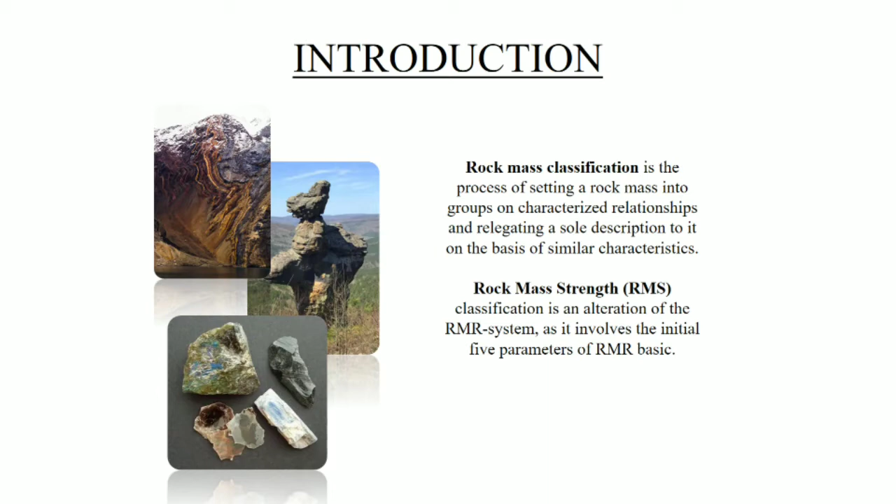Rock mass classification. Rock mass classification is the process of setting a rock mass into groups on characterized relationships and relegating a sole description to it on the basis of similar characteristics. While for rock mass strength, RMS classification is an alteration of the RMR system as it involves the initial 5 parameters of RMR basic. In the background of our project, there are 4 principles in rock mass strength, which are mathematical modeling, rock mass classification, large-scale testing, and back analysis of failures.

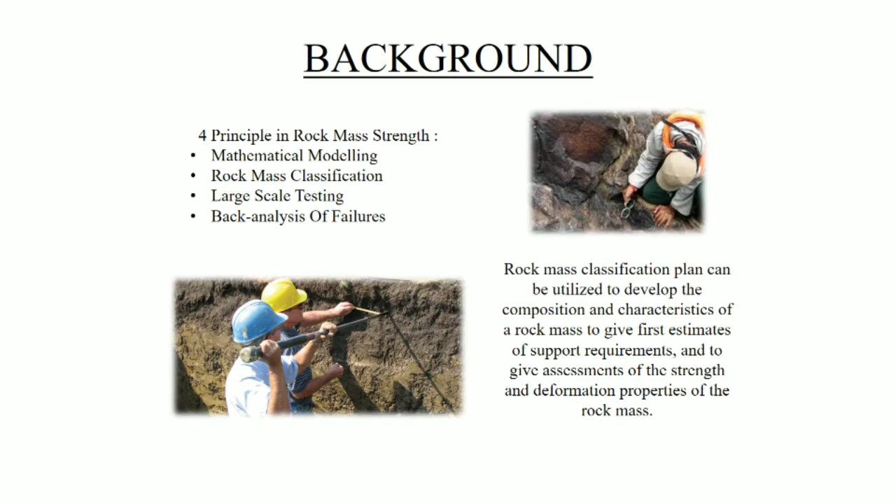In rock mass classification, plan can be utilized to develop the composition and characteristics of a rock mass, to give first estimates of support requirements, and to give assessments of the strength and deformation properties of the rock mass. The significant parameters in rock mass strength RMS. There are 6 of it, which is condition of discontinuity, joint or discontinuity spacing, groundwater condition, uniaxial compressive strength UCS, physical scale, and rock quality designation RQD.

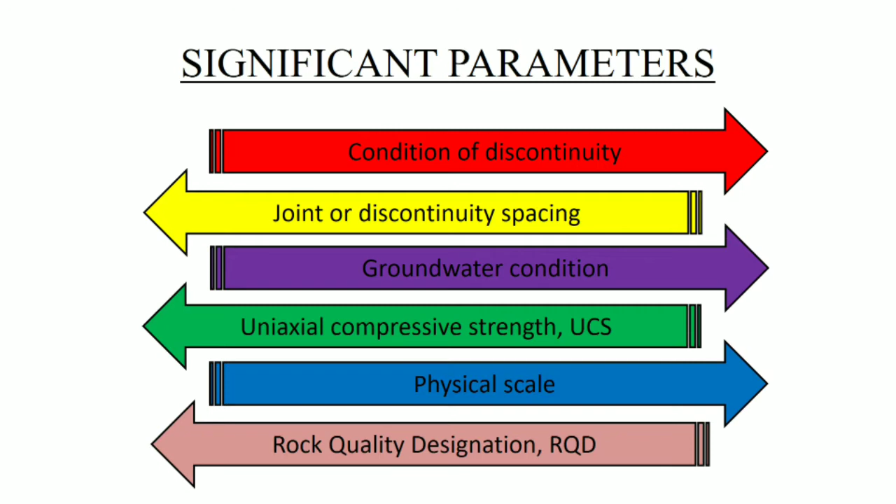In literature review, according to Bieniawski 1993, rock mass classification is the process of setting a rock mass into groups or classes on characterized relationships and relegating a sole description to it on the basis of similar properties, such that the behavior of the rock mass can be anticipated. He also stated that the rock mass classification systems were planned to act as a design aid and were not expected to substitute field perceptions, analytical considerations, measurements, and engineering judgment. However, it should be utilized related to other design schemes to devise a general overall rationale compatible with the design objectives and site geology.

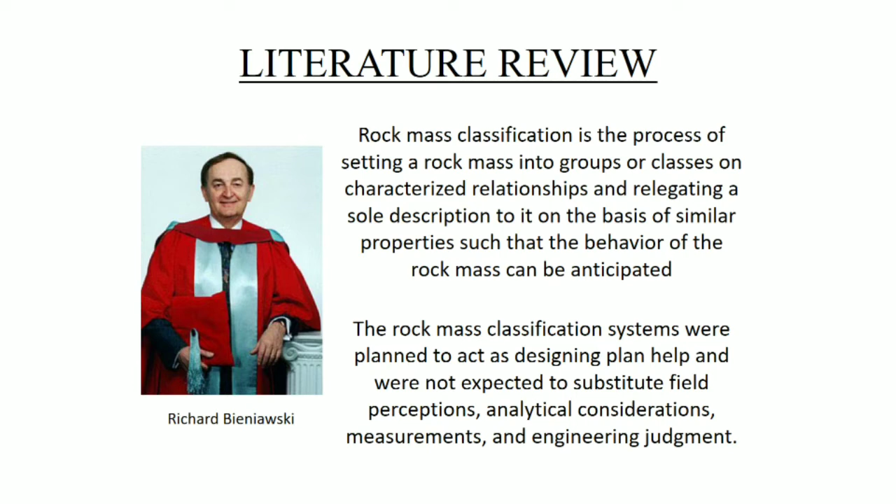The objective of rock mass characterization and classification. There are 5 of it. The first one is to partition a specific rock mass formation into various rock mass classes of fluctuating quality to provide a basis for understanding the characteristic of each rock mass class. To identify the most significant parameters influencing the behavior of a rock mass. To derive quantitative data for engineering design.

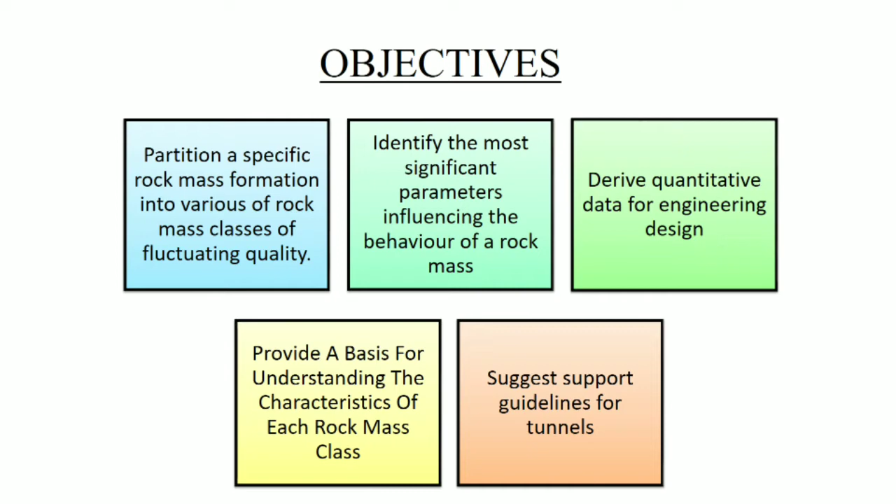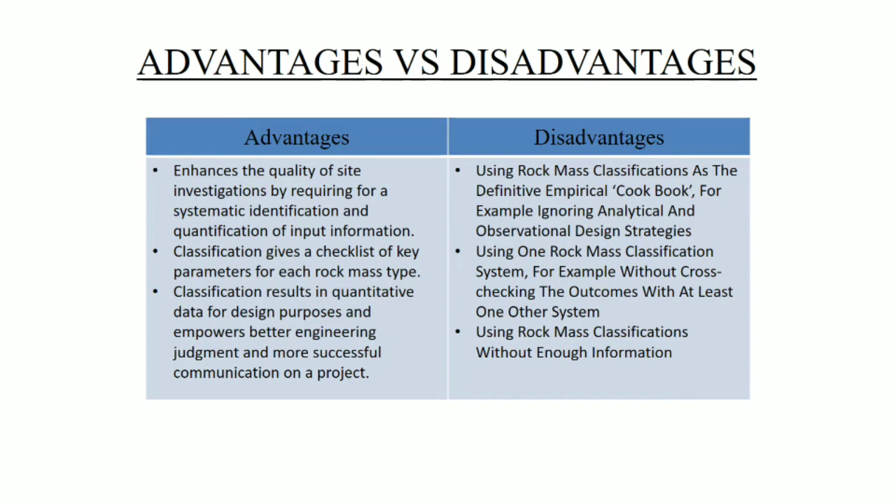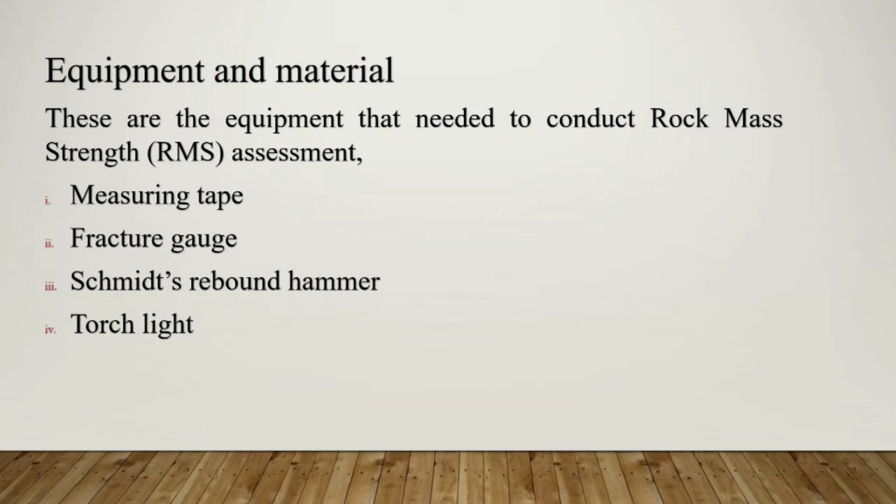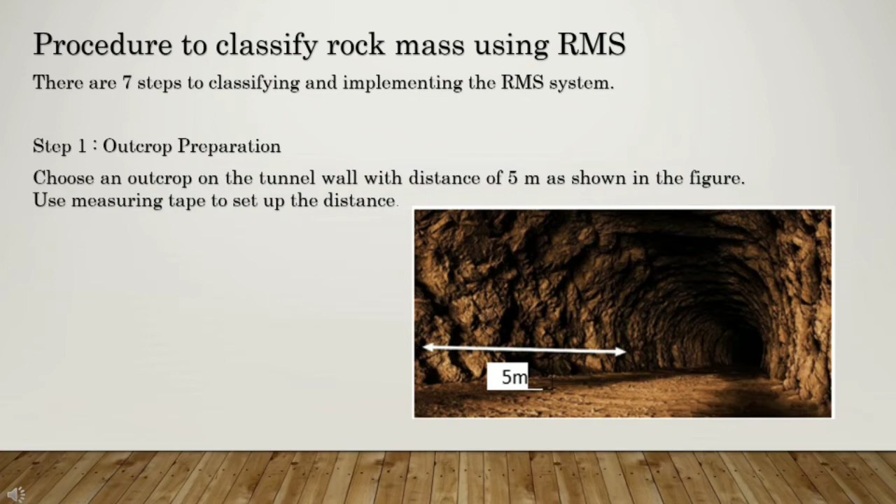Next is the advantages and the disadvantages of rock mass classification. As we can see from the slide, there are few of the advantages and the disadvantages provided. These are the equipment needed to conduct rock mass strength assessment: measuring tape, fracture gauge, Schmidt rebound hammer, and torchlight. There are 7 steps to classifying and implementing the RMS system. Step 1. Outcrop preparation. Choose an outcrop on the tunnel wall with distance of 5 meters as shown in the figure, using measuring tape to set up the distance.

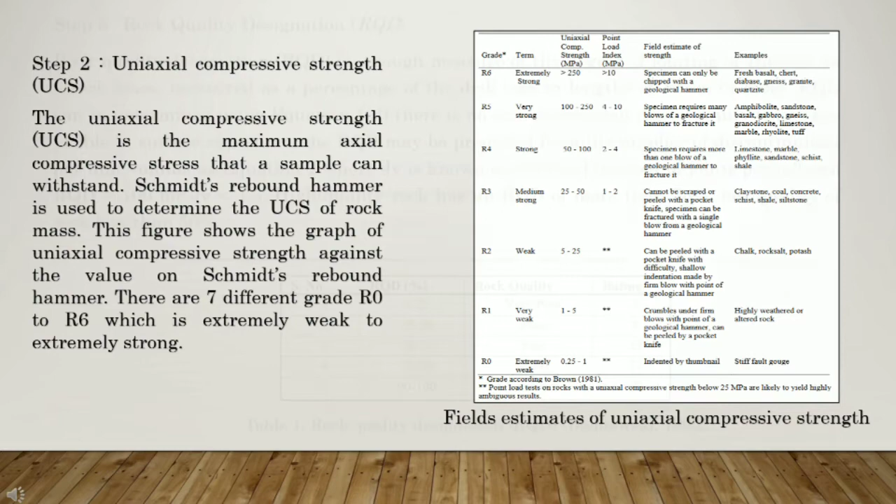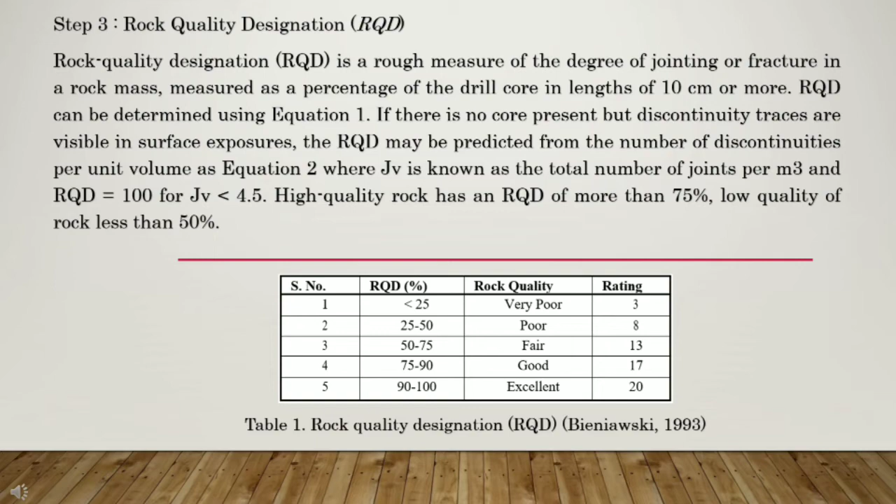Step 3. Rock quality designation. Rock quality designation is a rough measure of the degree of jointing or fracture in a rock mass, measured as a percentage of the drill core in lengths of 10 cm or more. RQD can be determined by using equation 1. If there is no core present but discontinuity traces are visible in surface exposure, the RQD may be predicted from the number of discontinuities per unit volume as equation 2, where Jv is known as the total number of joints per meter cube, and RQD equals 100 for Jv less than 4.5. High quality rock has an RQD of more than 75%, low quality rock has less than 50%.

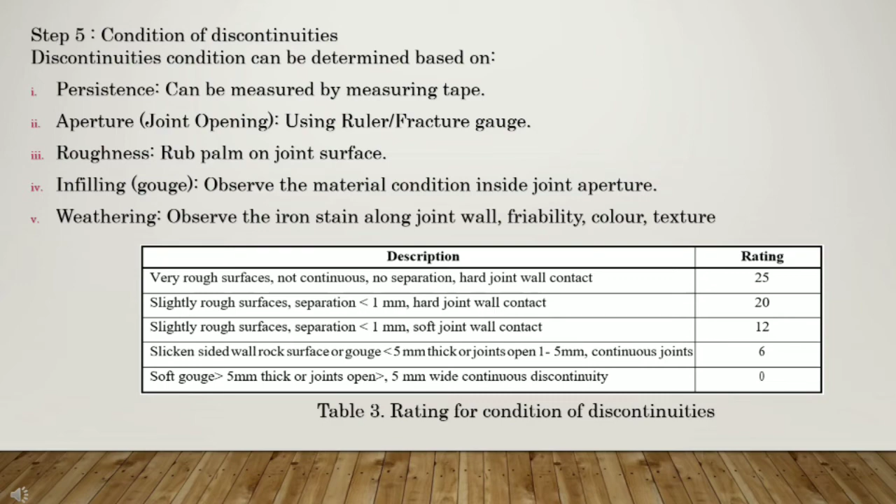Step 4. Joint or discontinuity spacing. One of the major geological features in a rock mass to classify strength is through joint or discontinuity spacing. Discontinuity spacing is one of the important parameters in describing the strength of a complete rock mass. Step 5. Condition of discontinuities. Discontinuities condition can be determined based on persistence, which can be measured by measuring tape; aperture, joint opening, by using ruler or fracture gauge; roughness, rub palm on joint surface; infilling, observe the material condition inside joint aperture; weathering, observe the iron stain along joint wall, friability, color, and texture.

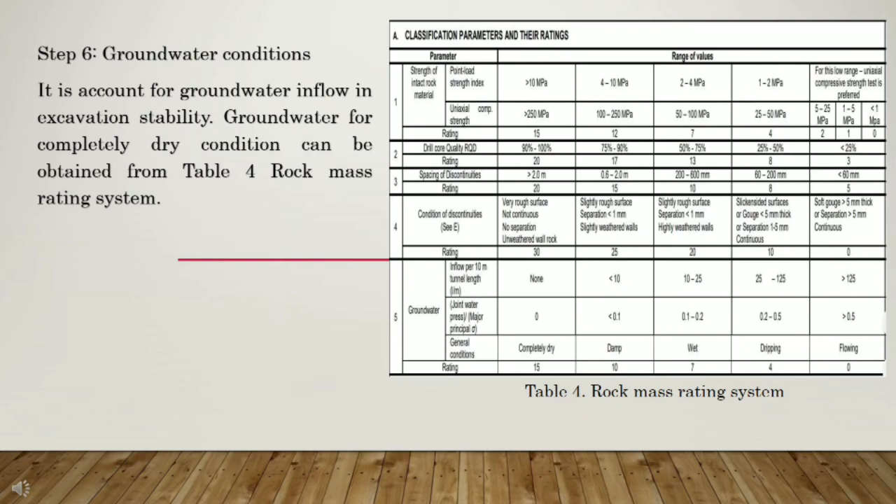Step 6. Groundwater condition. It accounts for groundwater inflow in excavation stability. Groundwater for completely dry condition can be obtained from the table below, rock mass rating system. Step 7. Physical scale. If the sample size increases, the scale effect in joints is that the peak shear strength decreases. The mechanical behavior of the rock mass depends on the strength of blocks created by random patterns of discontinuities and their strength. The number of blocks increases, the tilt angle also increases.

Rock mass properties are governed by the properties of intact rock and the properties of discontinuities in the rock. Intact rock can be referred to the fractured blocks between the discontinuities in a typical rock mass. Discontinuities in rock means any separation in rock mass having zero or low tensile strength. Therefore, the properties of rock mass can be determined by the parameters of rock joints and rock material. The existence of rock joints, material parameters and boundary conditions play an important role.

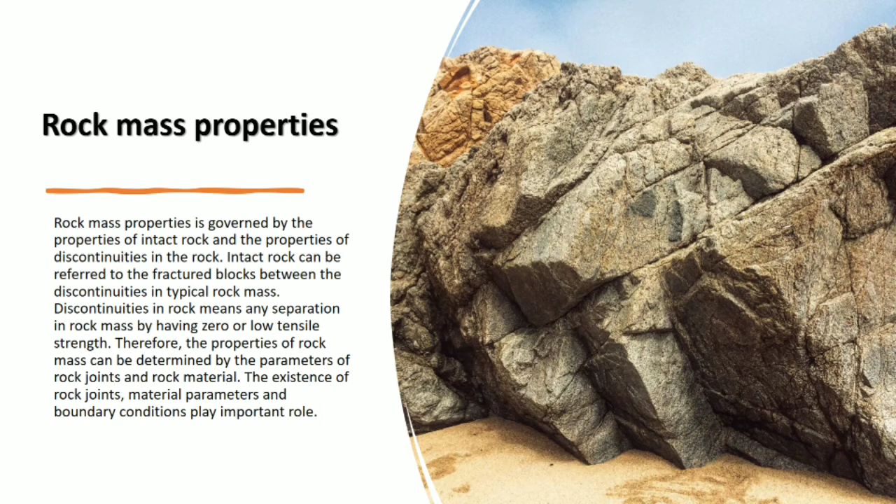In 1946, rock class and rock load factor classification by Terzaghi for steel arch supported tunnels. The rock mass is classified into 9 classes, from hard rock to blocky rock and to squeezing rock. For obtaining the support pressure from the rock load factor, Terzaghi suggested the equation P equal to Hp gamma H.

Singh and Goel 1999 give the following comments on the rock load factor classification. First, it provides reasonable support pressure estimates for small tunnels with diameter up to 6 meters. It gives overestimates for large tunnels with diameter above 6 meters. Third, the estimated support pressure has a wide range for squeezing and swelling rock conditions for a meaningful application.

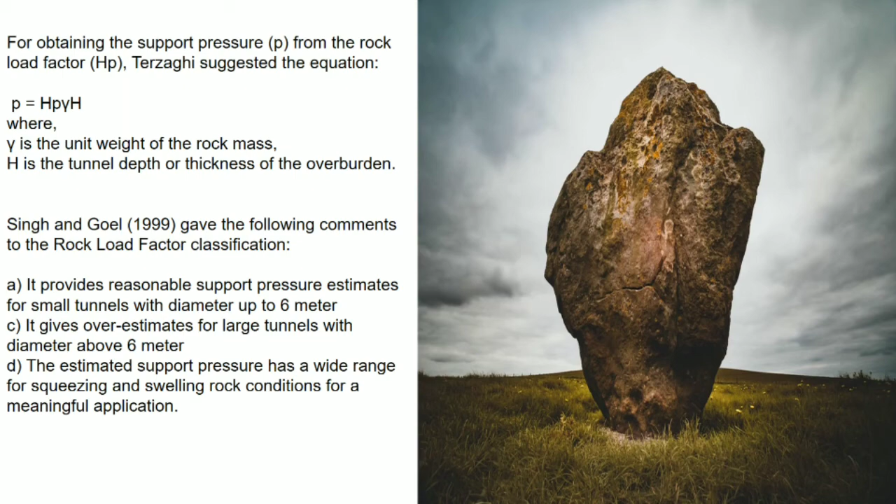Rock mass index is proposed as a value describing rock mass strength as a construction material. It is determined by the accompanying equation as stated. Jp is a reduction factor representing the impacts of jointing on the strength of rock mass. Jp equal to 1 for an intact rock, Jp equal to 0 for a crushed rock mass.

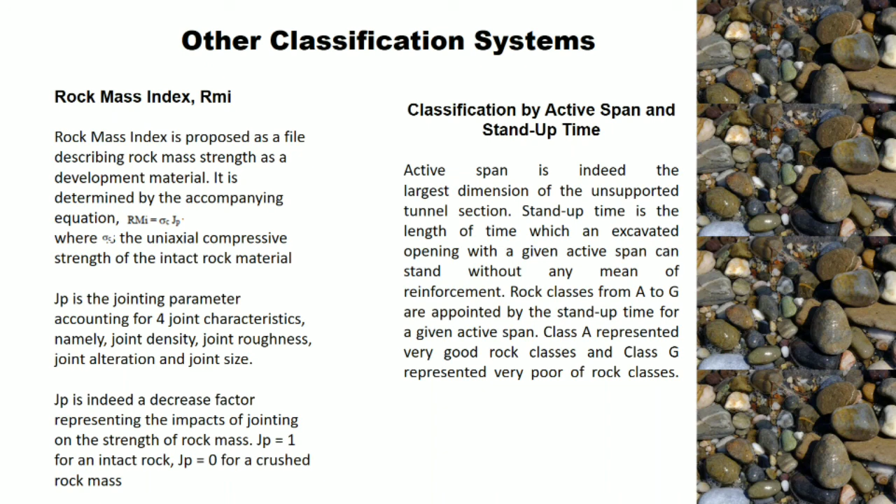Classification by active span and stand-up time. Active span is the largest dimension of the unsupported tunnel section. Stand-up time is the length of time which an excavated opening with a given active span can stand without any means of reinforcement. Rock classes from A to G are appointed by the stand-up time for a given active span. Class A represented very good rock classes and Class G represented very poor rock classes.